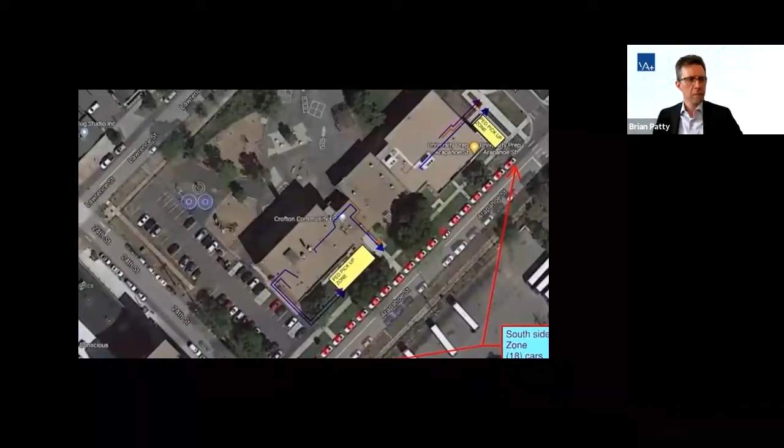Our firm, VA Plus, is the BIM consulting division of Vertical Arts, a Colorado design firm with offices in Denver, Steamboat Springs, and Edwards. We are currently assisting my son's elementary school, University Prep, as they make preparations for in-person instruction. We have spent several weeks developing tools and workflows centered around PDF floor plans, CAD files, BIM files, and mobility simulation software.

Our workflows are based on 4 key objectives: safer classrooms, safer circulation, safer arrivals and dismissals, and safer air.

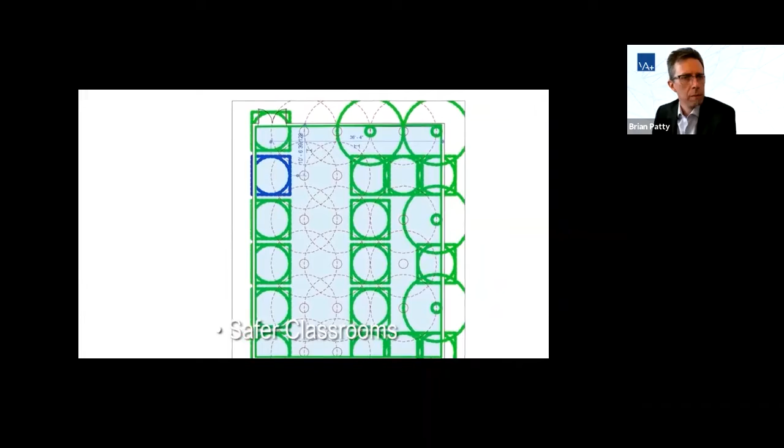Safer classrooms. VA Plus is using Autodesk Revit generative design and our own workspace density planning tool to develop safer classroom layouts that accommodate social distancing guidelines.

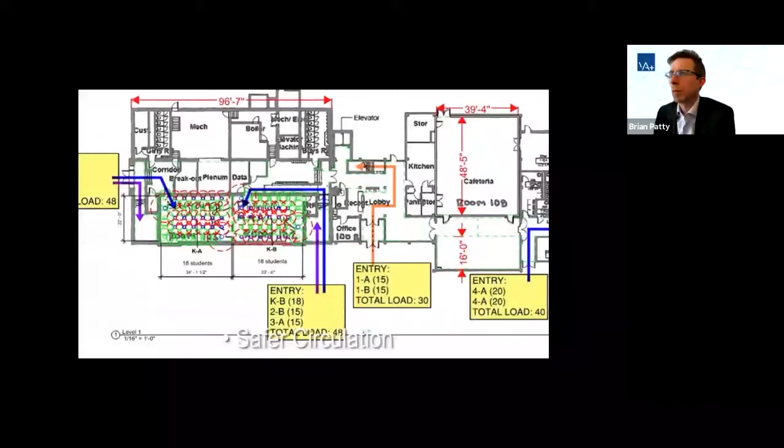Safer circulation. By implementing one-way corridors and not crossing cohorts, the protective effects of social distancing measures can be enhanced.

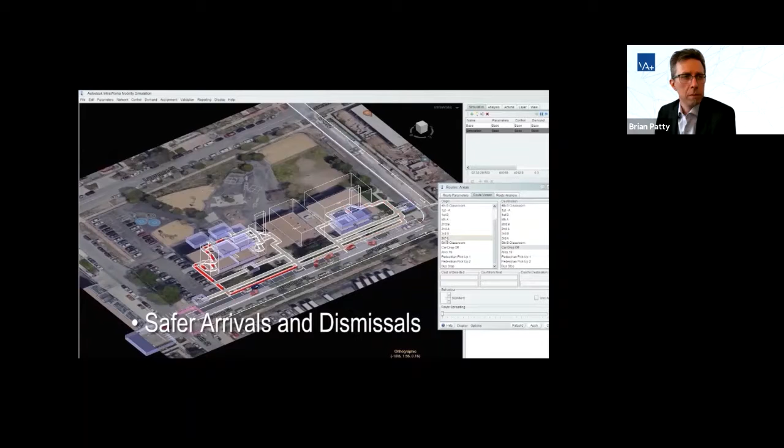Safer arrivals and dismissals. Using classroom loads and safer circulation, we can simulate student flow and help schools evaluate the need and benefits of staggered arrival and departure plans, and provide a framework for staffing demand and logistical communication requirements for implementing these plans effectively.

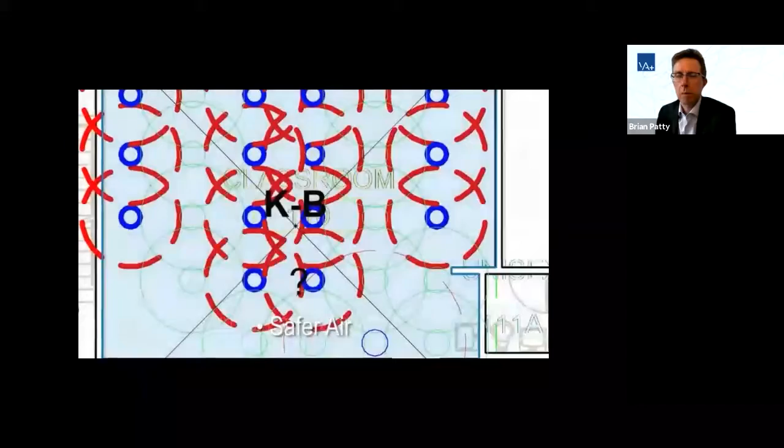And safer air. We are looking for mechanical engineers that can use components of our workspace density planning tool to integrate airflow analysis data into Autodesk Revit.

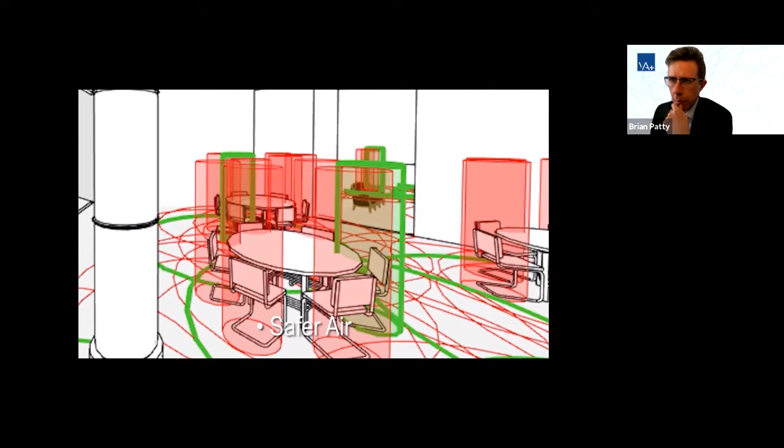Revit is a CAD BIM software package that architects and engineers routinely use. Our tool can be used to represent students, so an engineer can analyze the airflow and aerosol transmission potential with current HVAC and classroom layouts, and what mitigation options are available.

My son's school, like many schools that you're going to run into, didn't have a BIM model for their campus or anything like that. They simply had some pretty rough PDFs on some pretty small scale paper.

What we're going to cover in this process is just what it's like to take in a PDF and essentially set up the minimum amount to be able to evaluate it.

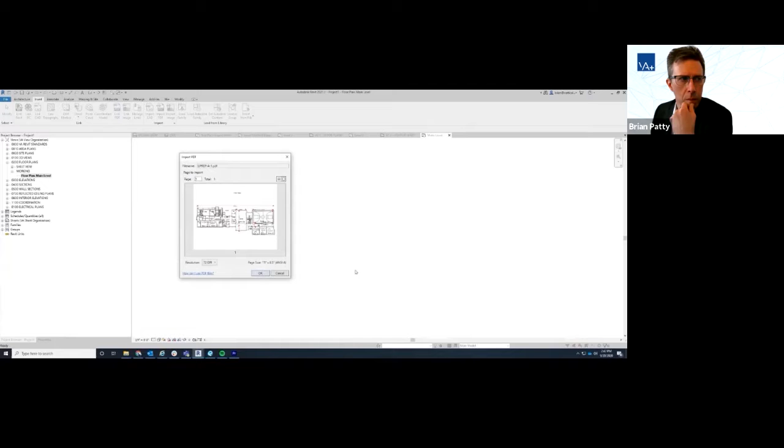First, we'll go ahead and just open up a blank file and go get the PDF by going to Insert. Pick out the PDF. I like to change the resolution a little higher based upon it being a small scale PDF, so the size shouldn't be a problem.

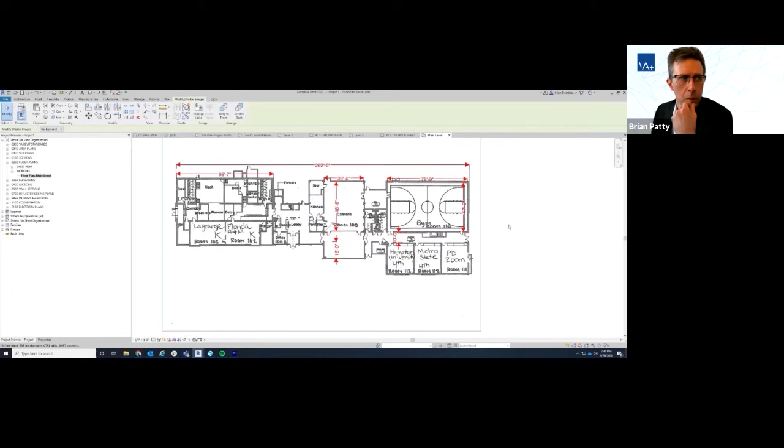Drop in a reference line in here to be able to establish the scale, and then just position it here to confirm that you've got everything correct. Once you're happy with the scale, you can go ahead and lock this file down by pinning it. Just double check it here real quick, make sure that matches up reasonably close to what we think is the right size.

So from here, what we're going to do is we're going to go in and actually use room separation lines in rooms to draw out the minimum amount of information to allow us to do rooms.

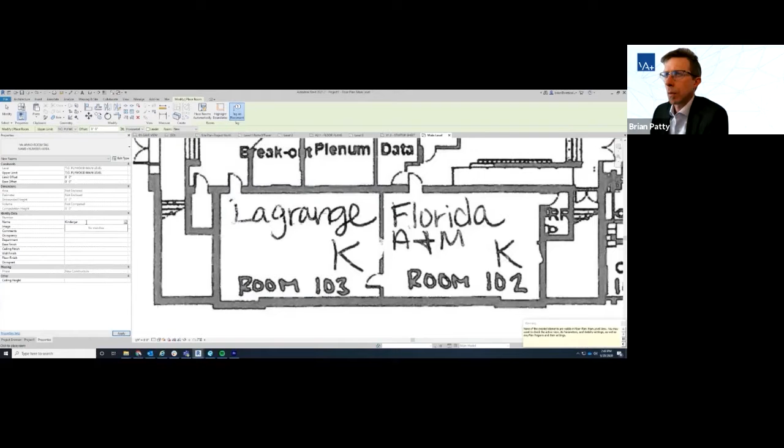The reason to do rooms is it allows us to schedule per room and per level, and also per building. That way we can determine loads and understand the entire system. And also, I like to be able to see the rooms themselves. Just makes it more clear which ones I've actually gotten done.

We'll move to another classroom here, and first thing we're going to do is you can see that we've just got a simple room tag. It's being driven by a comment to show how many students are in there, just to make it a little easier. Next, we'll go ahead and do a quick offset with some detail lines in the room, about 2 feet, just to imagine where students actually could get to.

Then we'll go ahead and place the student in here, and then we'll array this student, and reasonably maybe get 4 in this row.

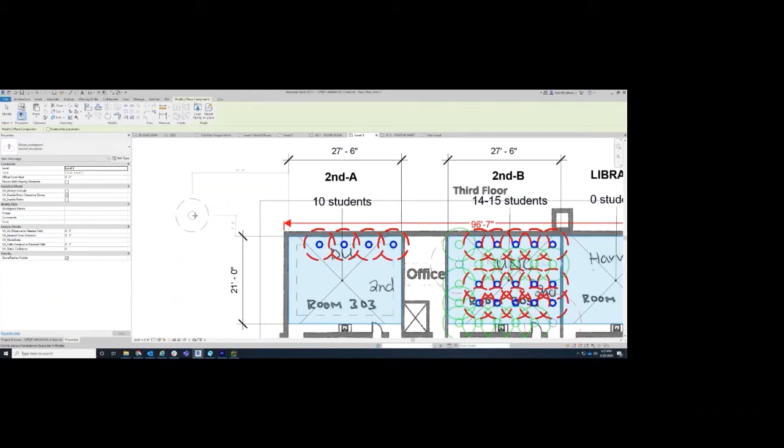Then let's go ahead, and what we'll do next is we'll put in some circulation and make sure that we're spacing the students out correctly. Again, it's just using the inner circle as the person, in this case a teacher, so it's a little larger than the students since these are elementary school students, and then a 3-foot social distancing based on DPS's standards.

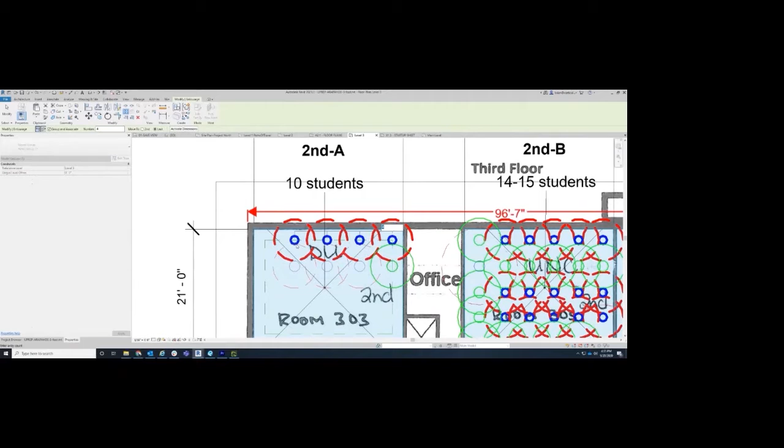And what we're doing here is we're just using some simple filtering on these views to make it easier to see the circulation versus the students. And we'll go ahead and add a couple more rows of students in here.

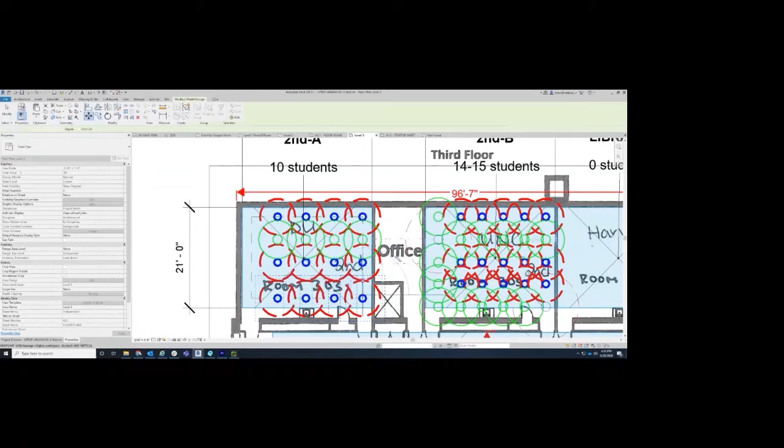Move them into place. So we've got achievable density in this layout, and we establish that we've got enough circulation for the students to actually move around. In this particular classroom they'll have two teachers in it, and we can start to look at alternate ways of where we can put circulation for the students to move around, or enough room for teachers to have a desk and for normal function as far as chalkboard or whiteboard operations in the classroom.

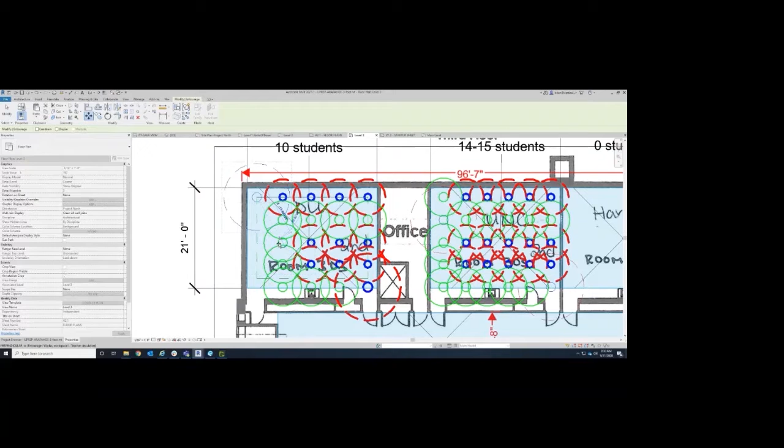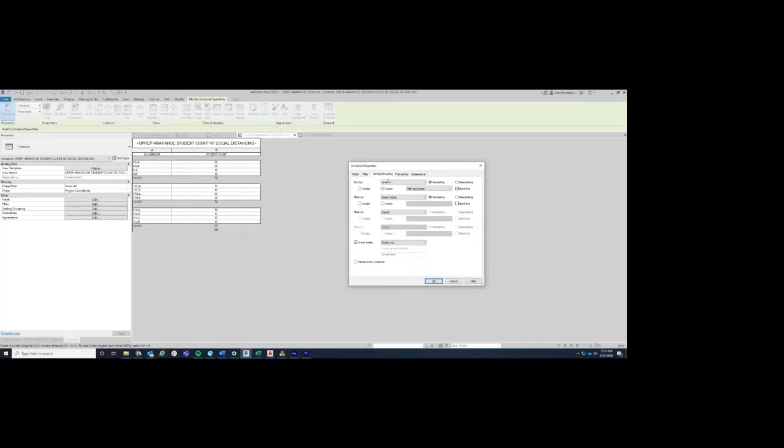Next, you can see what we've done is we set up a schedule to report what was going on in each one of the classrooms. Pretty simple parameters, just using a level, the room name, and the description, which we use to filter so we're only getting the students and not the teachers. Then we sorted it by level, so we could get subtotals and a good sense of what you had at each floor.

Next, we printed off the sheets with the floor plans into PDFs and brought them into Bluebeam, where we marked them up and indicated some loads as well as some one-way paths of travel. To do the paths of travel, we simply used a markup tool, the polyline, with an arrow on one end to indicate direction. Nothing too complicated here, but it allowed them to easily see with some colorful visuals how students would be able to circulate without mixing cohorts within the school.

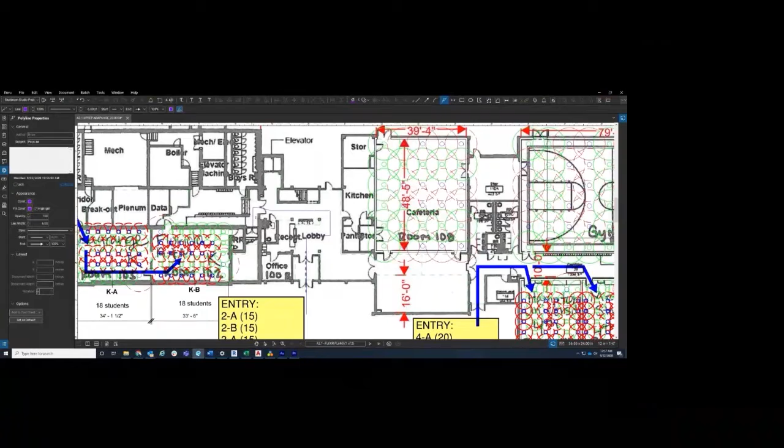The dismissals were essentially a reversal of those same paths, since the cohorts aren't supposed to mix with one another, and we kept the arrivals and dismissals from the same doors.

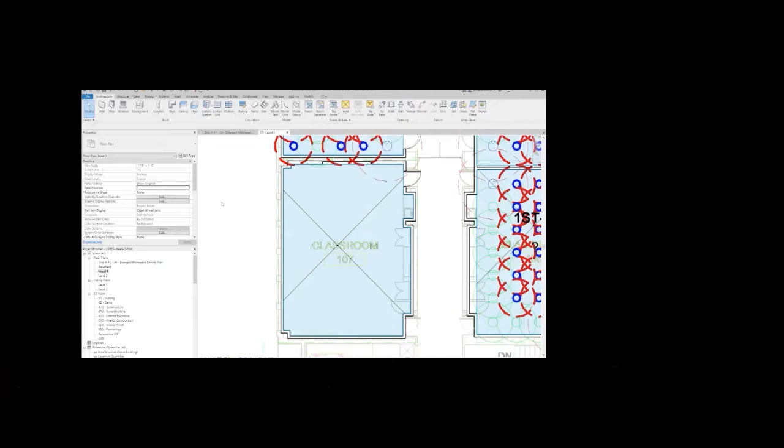Our workflow utilizes the generative design tool in Revit to create new classroom layouts. For this classroom, we'll generate a layout of student desks using a modification of the workspace layout script that comes with Revit's generative design tool. This allows us to explore configurations and find the upper limit of how many student desks can exist in the room while complying with social distancing guidelines.

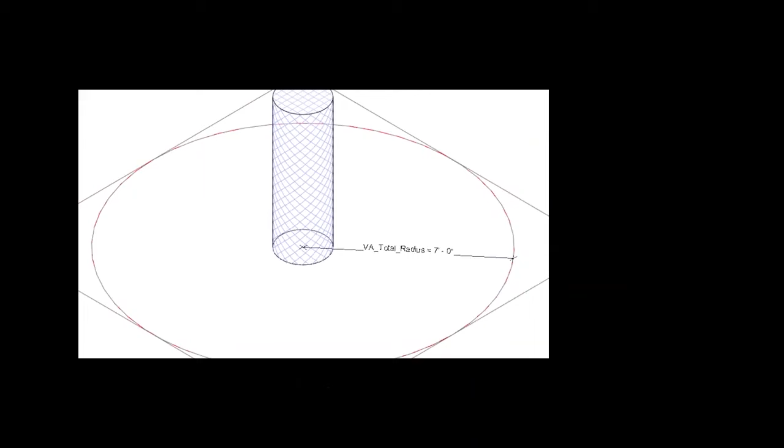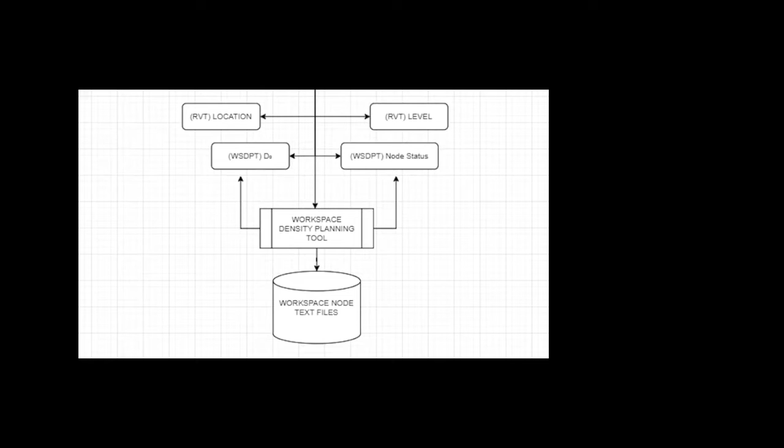We have modified the generative design script to also place our workspace family in addition to station furniture. These workspace families represent an occupancy point, which is common across our workflow and allows both generative and manual placement to have identically accessible, machine-readable results that are managed and reportable through our Workspace Density Planning tool add-in, which also makes this data available for tools outside of Revit in the form of plain text files.

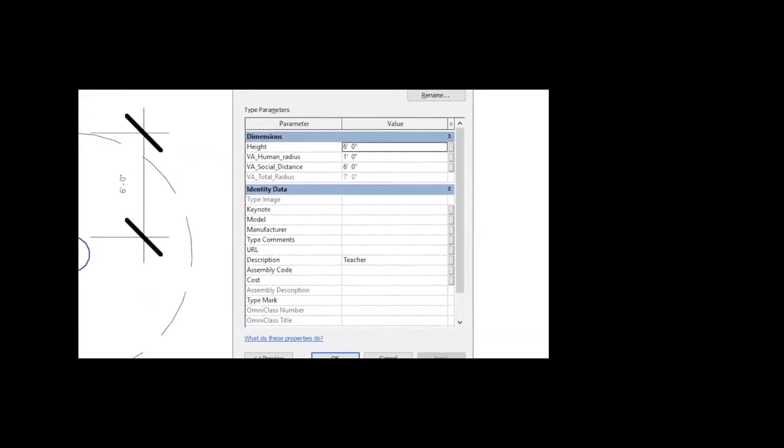In this project's case, the guidelines specify a radius of 3 feet for students and 6 feet for instructors. The social radius and inner human radius of workspace families can be adjusted in the family type, and multiple types can be used to represent different kinds of occupant stations, or to represent circulation nodes.

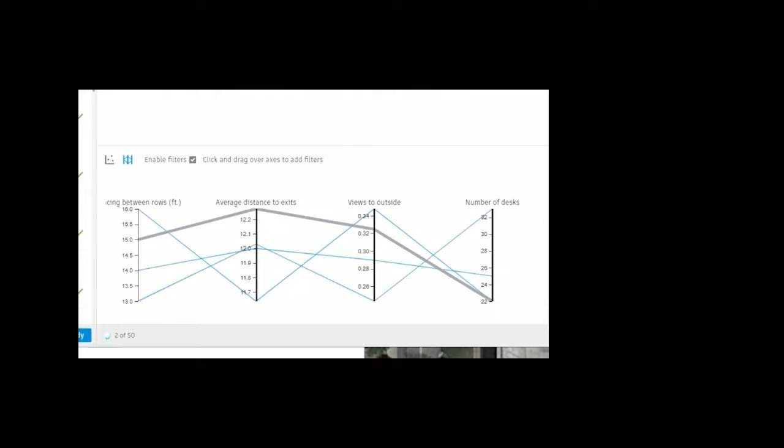Next, we generate layouts in the Revit Generative Design tool, then select a desirable layout, and Generative Design places our workspace families in the model. A 6-foot radius workspace type is also manually placed to represent the occupancy point for the instructor. But in order to represent the higher mobility of this role, which must have access to the student workspaces, we will also place circulation nodes.

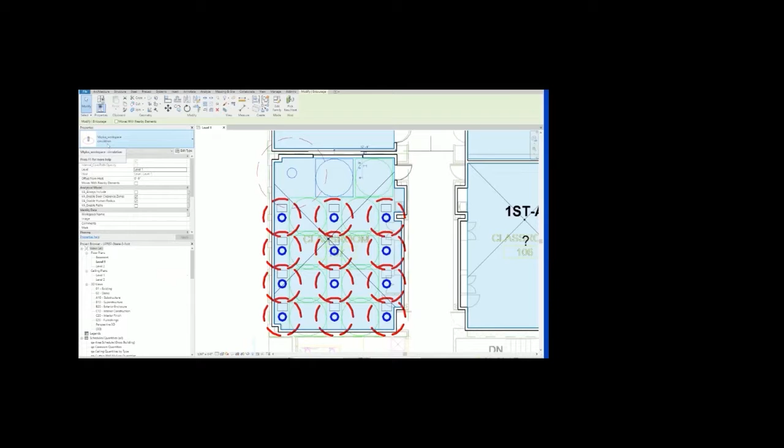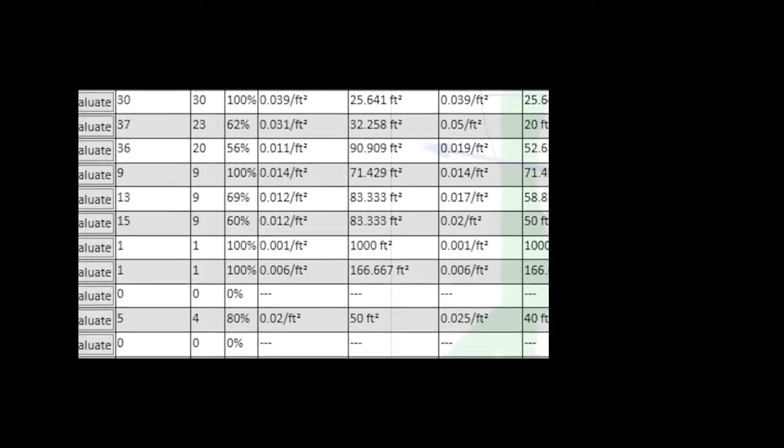Circulation nodes can be created as a type in the same workspace family by enabling the circulation parameter. This can signal to other tools, such as the Workspace Density Planning tool, other add-ins, or Dynamo scripts, that instances of this type are to be evaluated as a passage with revolving occupancy, which does not count towards occupancy totals of a room. Circulation nodes are placed in the aisles created by the Generative Design script's layout.

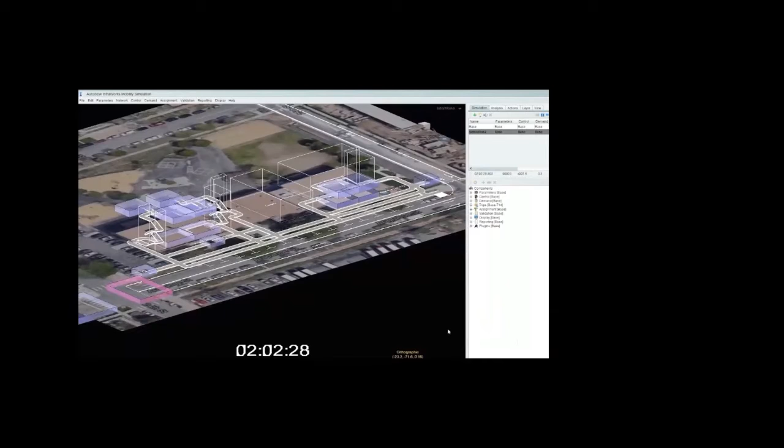We run the Workspace Density Planning tool to create a report. This process is performed for all the classrooms at the school. The passing workspace family instances will inform the final occupant counts for each classroom that are used downstream in InfraWorks mobility simulation in order to create a mobility study.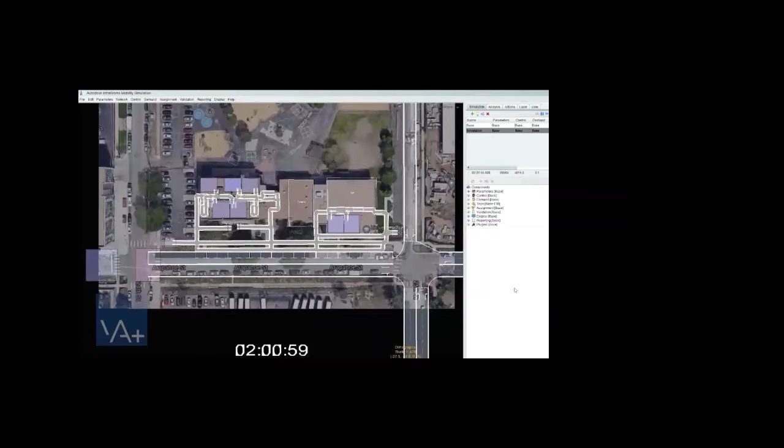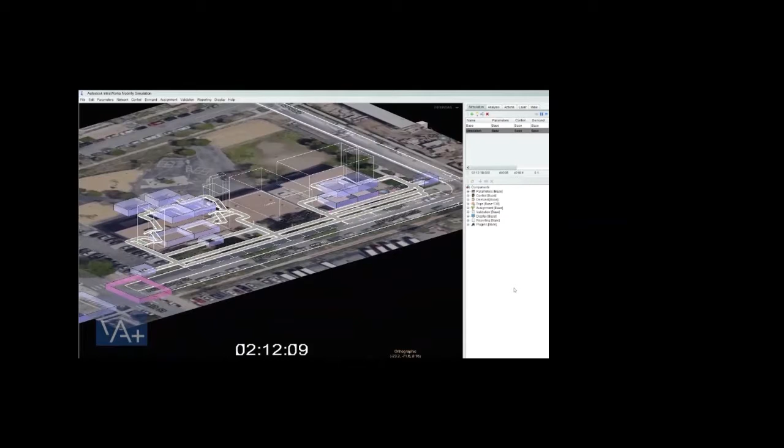Mobility Simulator in Autodesk's InfraWorks was the perfect tool for us to use to validate our proposal. We were able to simulate our specific dismissal plan and see if it met our client's goals and COVID-19 guidelines. The tool has enabled our clients to really visualize the dismissal plan and promote a more informed conversation leading to the best solution path. Benefits of using Mobility Simulator include showing how long dismissal and arrival will take, showing the length of each student trip, showing if social distancing is being met, and representing the traffic density at the pickup zone.

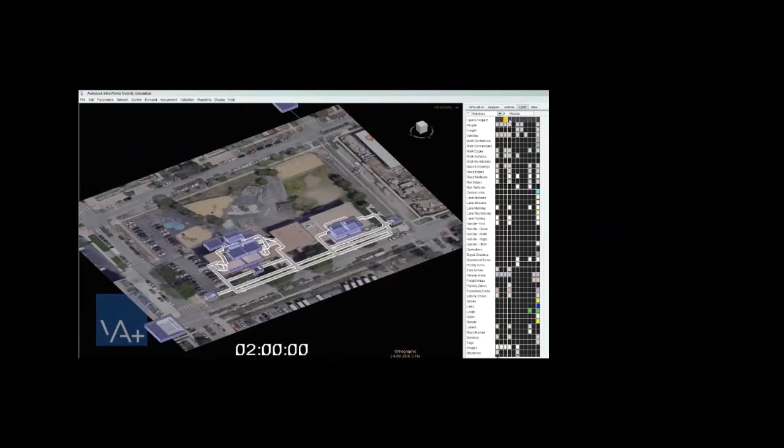Using the dismissal plan PDF outline, a network is created in Mobility Simulator to simulate the dismissal sequence. Classrooms are represented by areas, as well as the bus stop and pedestrian pickup zones. This allows us to route students from all the classrooms to the bus stop, the pedestrian pickup zones, as well as to the vehicle pickup zone based on real data provided by the school district.

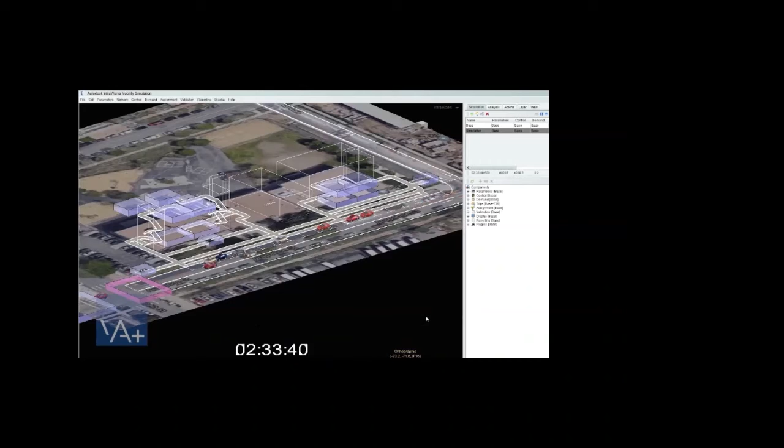Social distancing is simulated by increasing the space parameter for people to the social distancing radius, as well as by adjusting the capacity of walkways to their length divided by the social distancing radius.

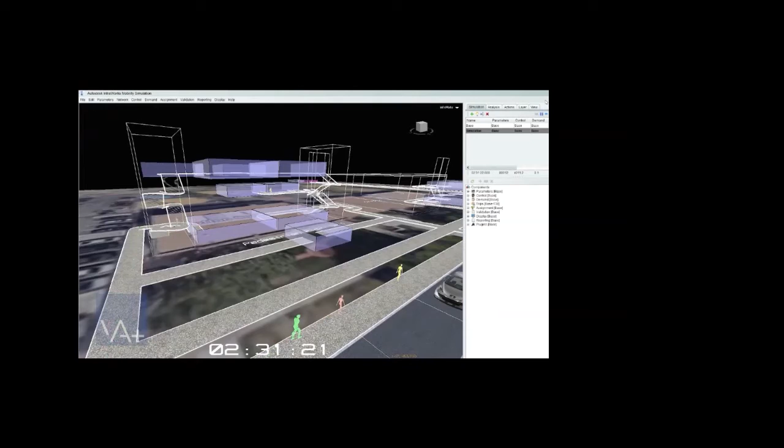We wanted to show the bus dismissal taking place before the rest of the student dismissal to reduce corridor load. So we set up some additional terms and demand profiles, allowing us to stagger the dismissal of groups of students.

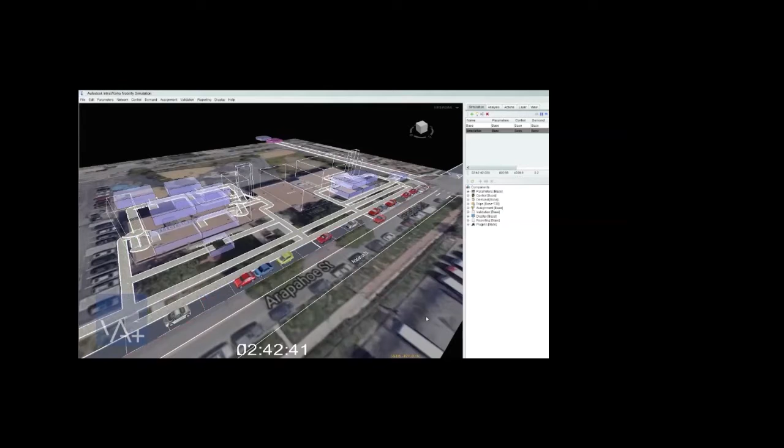Many school layouts will lead to conditions where there are multiple routes which connect destinations. This can be helpful in simulating typical situations where people will make choices more randomly, but for our purposes, we want all of the students to follow their dedicated paths, helping avoid collisions.

We utilized the route spreading tool to eliminate deviation from the main paths. This tool is also used to test the network and make sure routes are connected and functioning as planned.

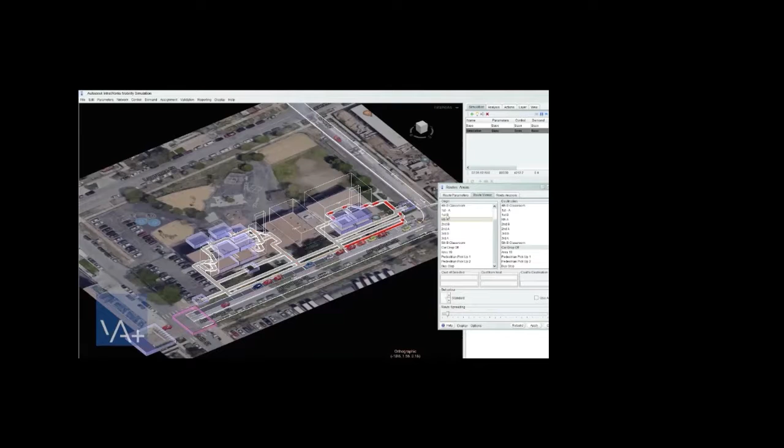We wanted to use the simulation to show the potential impact our plan would have on the vehicle queue for pickup, so we incorporated the vehicle pickup into our simulation.

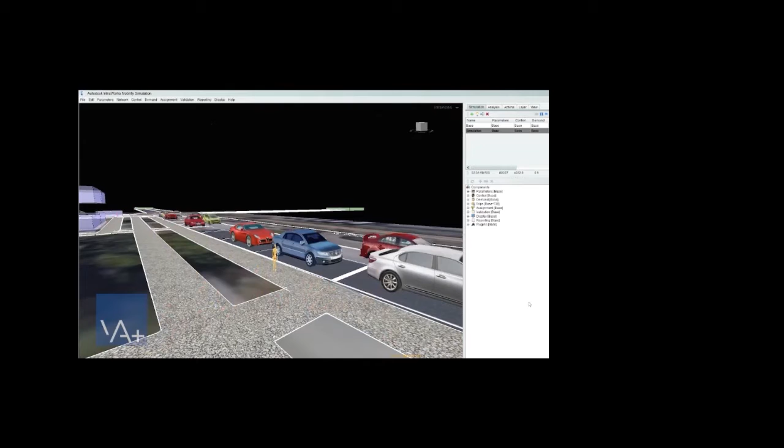We have a group of cars assigned to fill up the pickup lot over the simulation time. As students arrive at the pickup lot, they will get into a waiting car and leave. We increased the time for students to get in the car to help simulate additional time the cars will be waiting in the parking stalls.

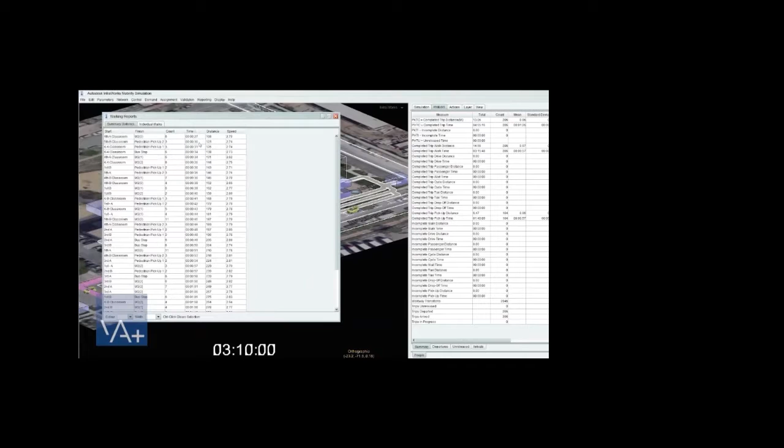To evaluate the simulation, we utilized the information shown in the Analysis tab, which gives a summary of trips with times and distances. We then reviewed the walking reports, which show individual trip times and distances, and the level of service, which shows if spacing is being met on all walkways.

These tools can show that the client's goals are being met and their concerns addressed regarding the time for dismissal and the ability to enforce social distancing.

Mobility Simulator can be used to solve a range of problems related to getting students safely back to school, from arrival sequences and class transition sequences to simulations for middle and high schools, as well as parking and class transition simulations at universities.

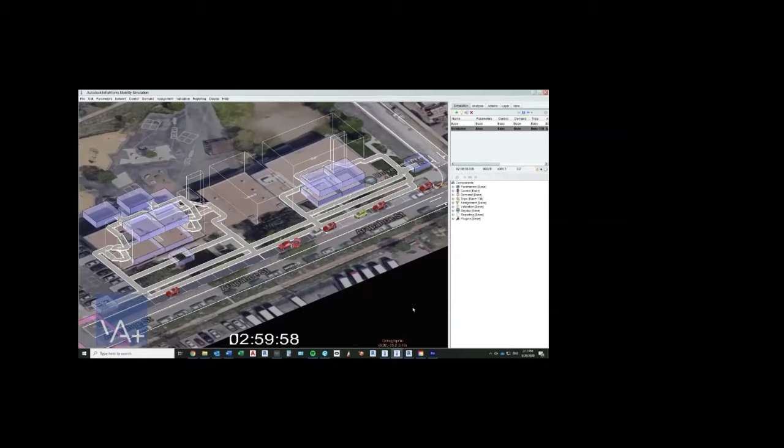Today I'm going to show you some basic tools, workflows, and techniques to help you get started using Autodesk's Mobility Simulator. Autodesk Mobility Simulator is part of Autodesk's InfraWorks and is included with the AEC package.

Wanting to learn more about this powerful software that our company already has access to, I spent just under 2 weeks working with Mobility Simulator to learn how it works and to explore how it could be used to improve architects' workflows and help them better solve their clients' problems.

After learning the basics of the software, I began to explore how Mobility Simulator could be used to evaluate back-to-school procedures and help improve students and students' families' safety as schools are beginning to reopen during the COVID-19 pandemic.

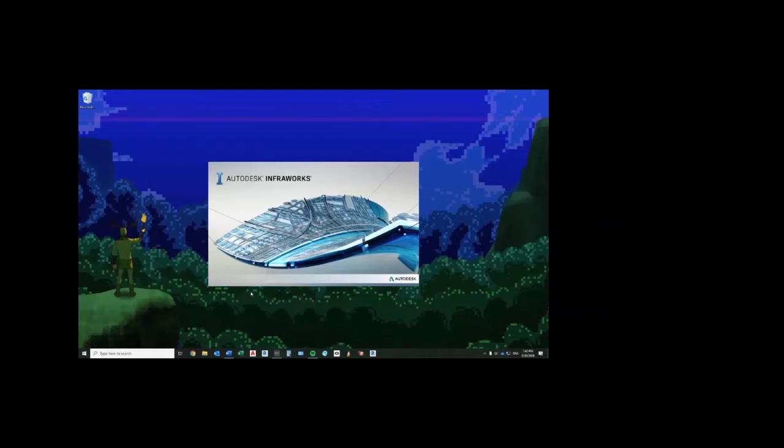To get started, we are going to launch Autodesk InfraWorks to begin using Mobility Simulator. Open an InfraWorks project - it can be any project. Once we are in Mobility Simulator, we will start a new file anyway.

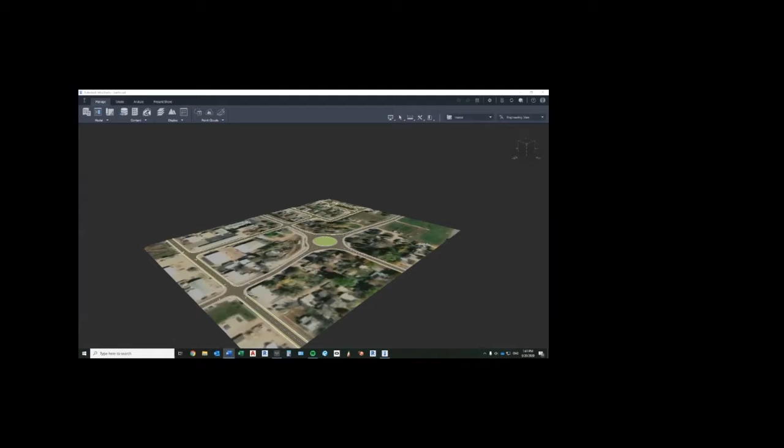Once we are in the model, we need to draw a traffic study area. Go to the Analyze tab, click on the Transportation drop-down, and then Mobility Simulator. This will then prompt you to draw a traffic study area by defining the corners of a polygon. Once you have drawn your shape, hit Enter, and then right-click within the area and select Mobility Simulator.

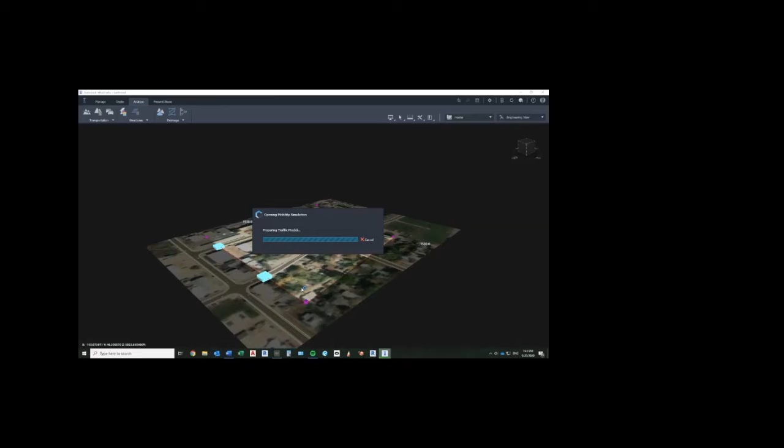This will launch the mobility simulation software. Please note that you will need to have a Java runtime environment, or JRE, installed on your machine in order for this program to function.

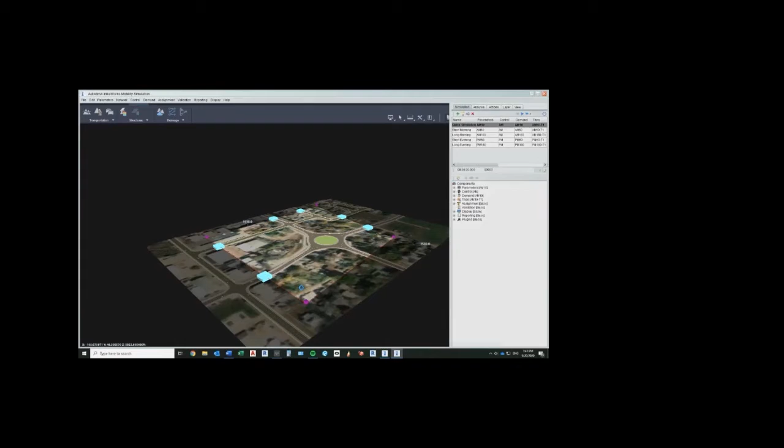Once the software is open, go to File, New, and select Cancel when the wizard opens. This is our interface for Mobility Simulator. You can orbit with the left mouse button, pan with the right, and zoom in and out using the scroll wheel.

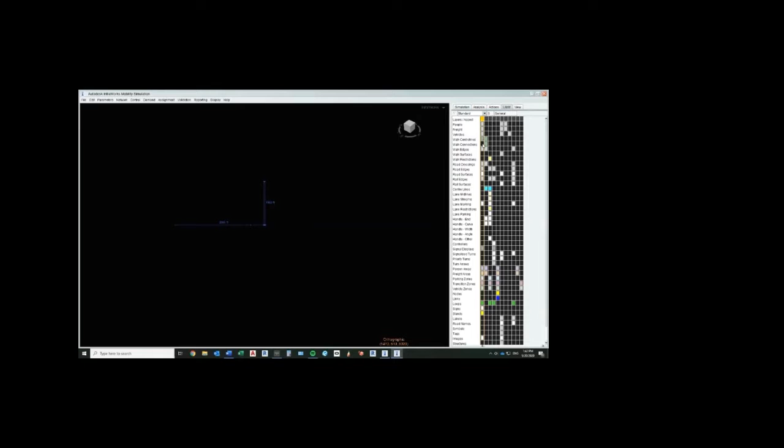Before we do any modeling, we need to make sure that we are in orthographic mode by hitting the O key. We also need to turn on some layers so that we see everything we need to as we are modeling. In the Layers tab, ensure that Walk Center Lines, Walk Connections, Handle End, and Handle Other are highlighted.

Finally, select the top of the view cube to orient to a plan view. Now that our interface is set up, we are going to create a simple simulation in which we have pedestrians walking from an origin to a destination.

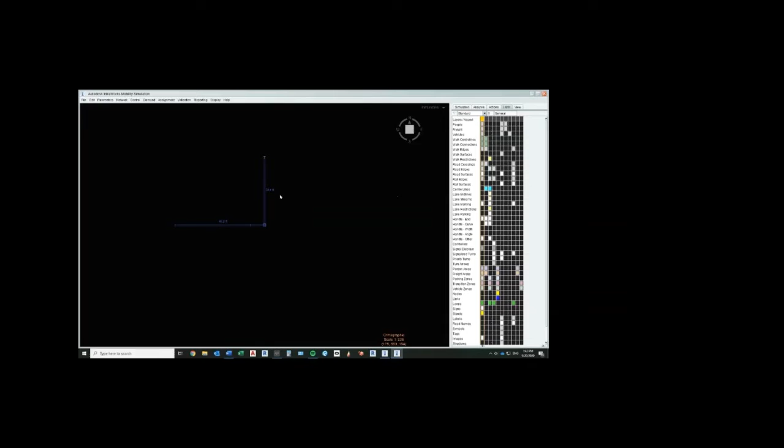Zoom in until the cursor length is about 50 feet. Right-click, click Walkway, and select New Walkway at Cursor. A window will open where you can input the length, width, and name of your walkway. You will notice that the default length is set to the length of the cursor. We will make our walkway 6 feet wide and select OK.

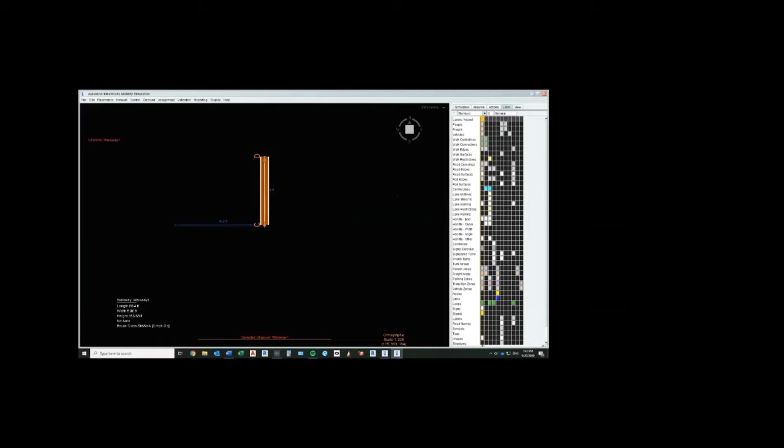I'm going to add another leg to the walkway at an angle. If you deselect the walkway, you can rotate the view using the right mouse button. Then we will position the cursor just above our existing walkway and create a new walkway at the cursor again. Our simulation will need at least 2 walkways to function correctly.

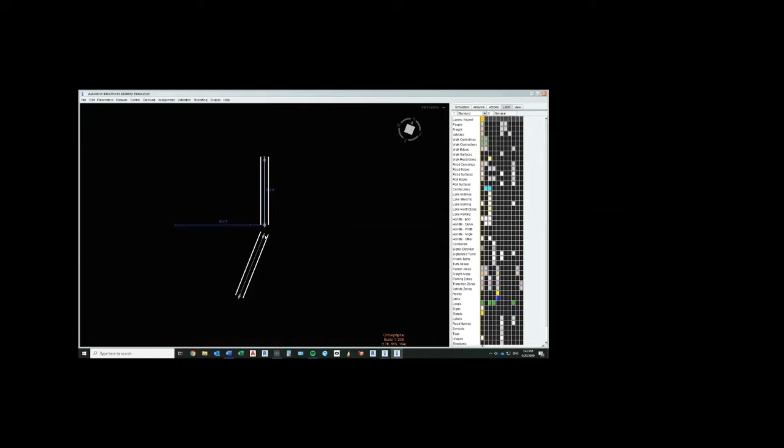Another way to achieve this is by selecting your walkway with the middle mouse button, right-clicking, clicking Walkway, and selecting Bisect. This will divide your walkway into 2 pieces connected by a walkway connection. Next, we are going to select the endpoints of our walkway, right-click, Walkways, New Connection to join them together.

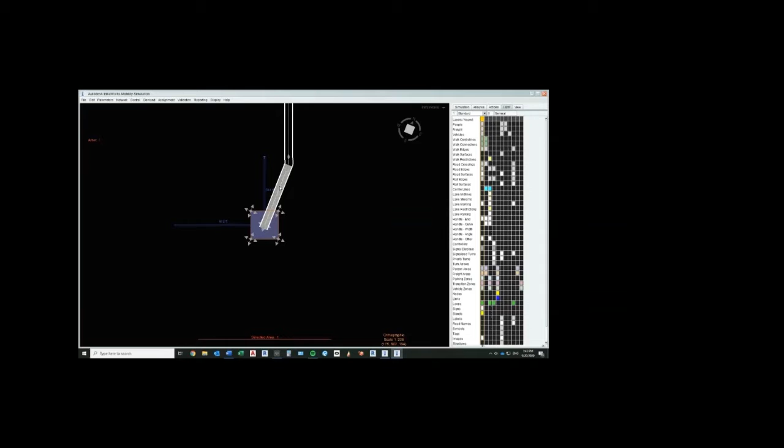Next, we need to add areas. These are where people will originate from, as well as where they will travel to. To place an area, pan your model until the cursor is just above a walkway endpoint. Right-click, New Area at Cursor. It is critical that your area is connected to the walkway. You know they are connected if the walkway highlights when the area is selected.

Also, if you select the walkway, it will indicate which area it is a part of. Do the same to place an area at the other end of your walkway. Save your model after creating your areas. This will force the program to correctly recognize the areas.

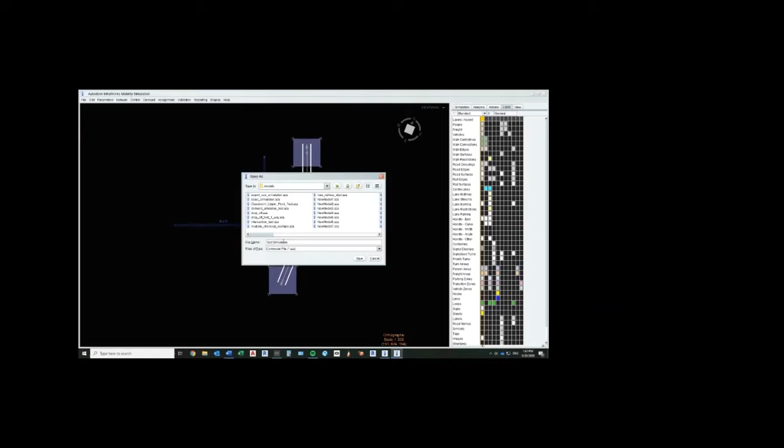With our network in place, we are going to move on to setting up the parameters and the demands for our simulation. First, we are going to set up the term for our simulation. Go to Parameters, Terms, and this will open up the Simulation Term window. Currently, this is set to run from 8 o'clock to 9 o'clock. Let us adjust this time to be from 8 to 8:30.

Now we are going to add some person types. Go to Parameters, Person Types. Click on the plus button to add a person type. Then we can adjust their name, the color of their avatar, and some additional parameters. In the other tabs of this window, we can adjust other aspects of the person type, including their speed and other physical attributes. We can also create groupings of person types as well.

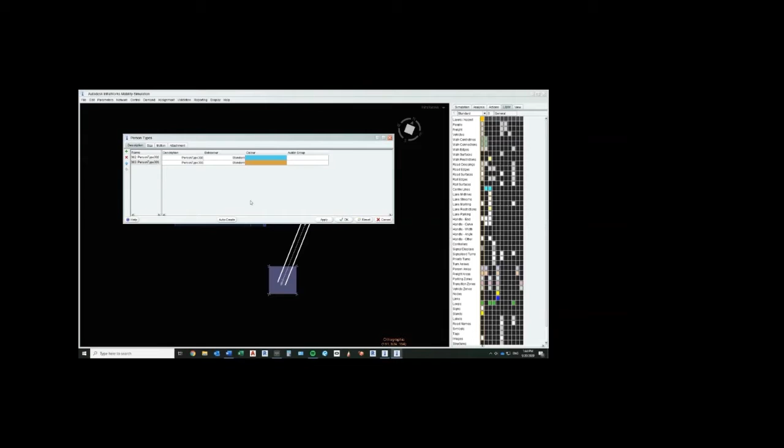Let us create another person type with a different color. Now say there are 80% of the first person type and 20% of the second. To show this in our simulation, go to Demand, Demand Divisions, and then input the percentages for Division 1. This means that demand created from Division 1 will include the input ratio of person types.

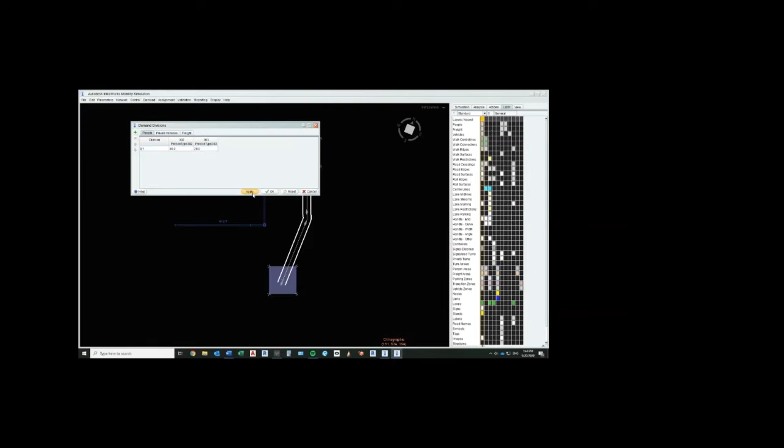Now that our parameters are set up, we are going to set up our demand. This is what will inform the simulation how many people are moving between the origins and destinations. Go to Demand and then Demands. This will open the demand editor. Click on the green plus button to add a new demand matrix.

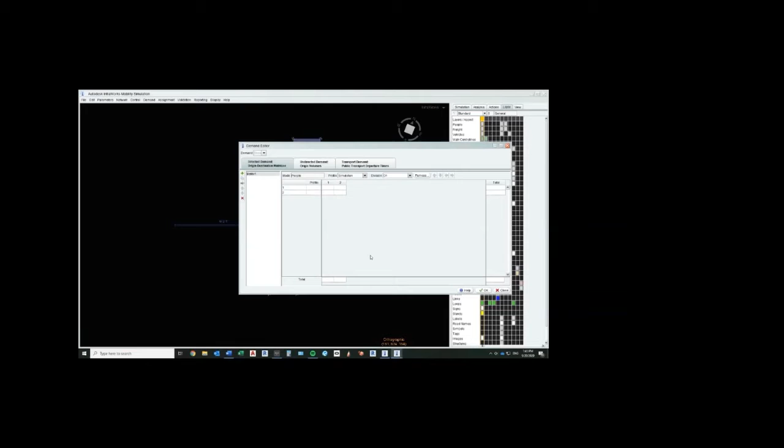Ensure that Division 1 is selected and hit OK. This creates a matrix with all of our areas represented at each axis, one being origins, the other destinations. When you click on a box in the matrix, an arrow will appear in your model which shows the origin and destination, as well as the direction of the trip you have selected. Let us add 200 people moving from one area to the next.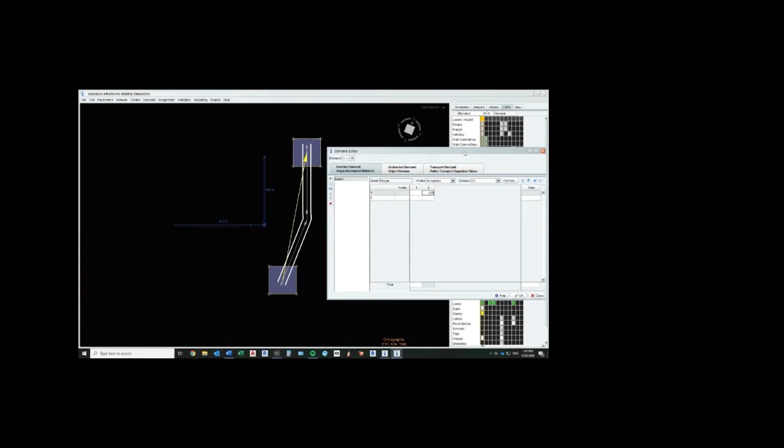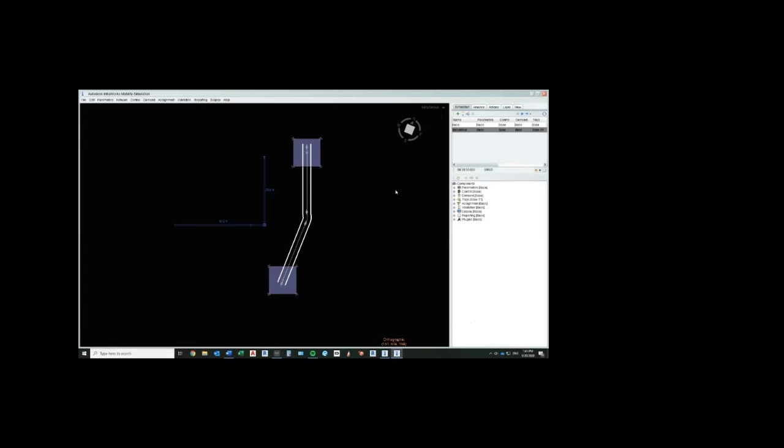Now that our demand is set up and trips have been generated, we are ready to begin the simulation. In the Simulation tab at the right of your screen, click on the green plus icon. This will create a new simulation with our current parameters and demands active. With the new simulation selected, click on the light bulb icon. This will make this the active simulation. Click on the play button to begin the simulation. You will now see your agents begin to complete their trips.

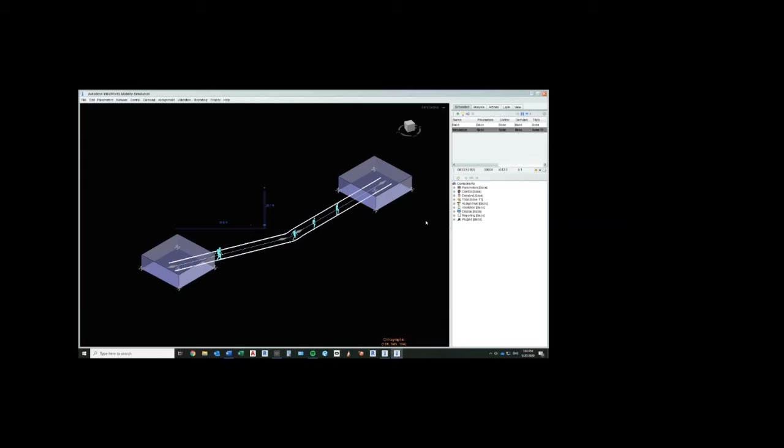Mobility Simulation has many additional features that will allow you to simulate multimodal transit, pedestrian crossings, parking times, elevators, and much more complex networks to simulate real-world problems. Hopefully, this demonstration has provided a footing for you to get started using Mobility Simulator and help bring the power of this AEC-included tool to your clients.

All right, we're nearing the end of this. It took us a little while to figure these pieces out, so if you need help, reach out to us, and we would certainly be grateful to help anybody help their local schools, things like that, to be able to do this.

We also have an add-in that we have developed. Hi, I'm John Resch, and I'm the BIM engineer at VA+. This is a preview of an add-in we're currently developing for linking Revit content into InfraWorks Mobility Simulator.

There are a number of benefits we have found to bridging these two environments, chiefly reducing the need to recreate or redraw content that already exists. By making the use of Mobility Simulator more accessible to Revit users, this enables mobility simulation to be used in more design decisions in existing BIM-centric workflows. And by bridging the concepts of mobility as a system into Revit, this also creates an interoperability path.

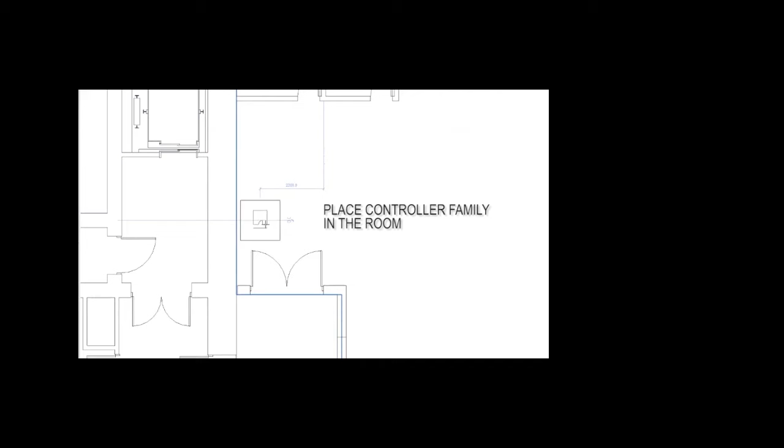Now let's take a look at how this looks from a usage standpoint in Revit. For ordinary rooms, you place a room controller family within the boundaries of the room. This tells the add-in to sample and categorize the room in order to model it as a mobility simulator area, and the add-in will create a segment between it and the nearest door for typical cases.

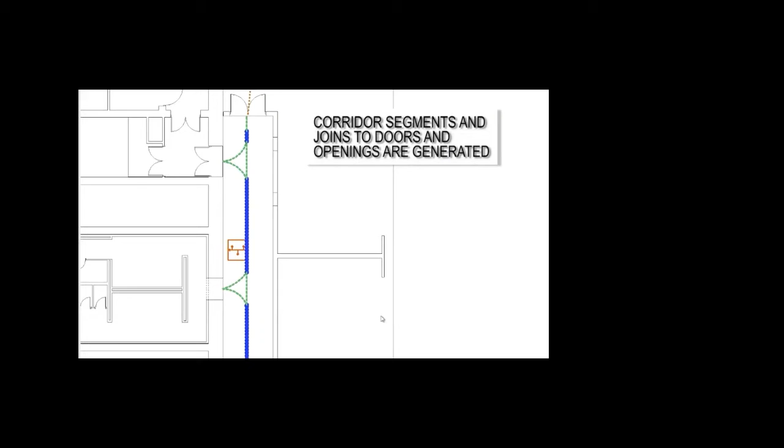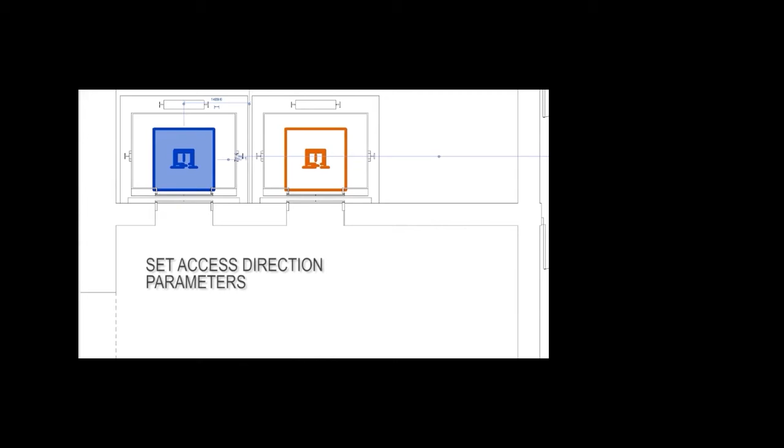Next, we set up an elevator or lift stop for this floor plan's level by placing a lift type of the controller family, and set the direction parameter for the direction of access. Then we create another corridor to represent the elevator lobby.

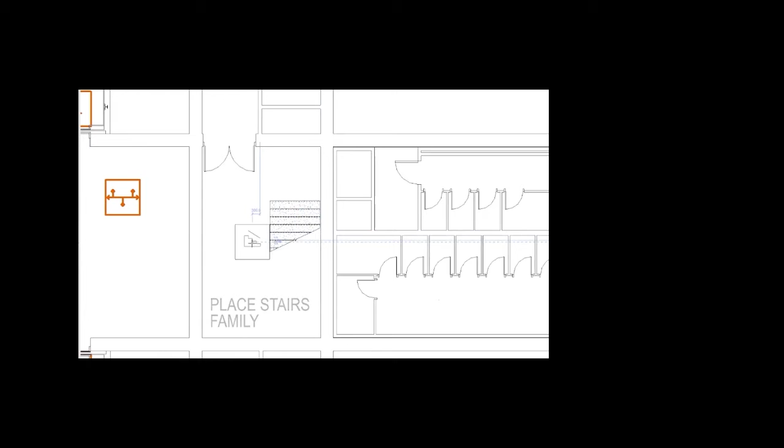Next, we create another corridor in the core of this tower model, which happens to have access to stairs. This time we place the stairs type of the controller family, which tells the add-in to sample the stairs inside the Revit room and generate a more complex equivalent structure in Mobility Simulator. We also add a vestibule for those stairs.

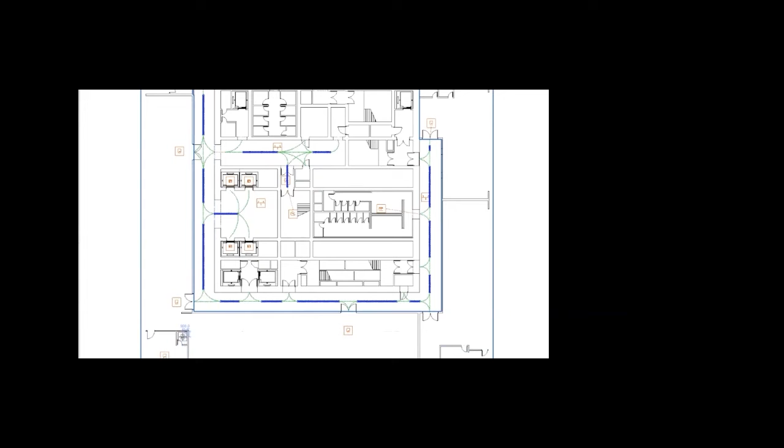For larger, more complex rooms, there will be a need to represent a sub-network that permits connections through the room between doors and subrooms. For this, we place one room type controller family near each door, and subroom type controllers within each subroom. This tells the add-in to analyze the room as both a corridor and as a destination, which can participate in the mobility simulator's demand matrix.

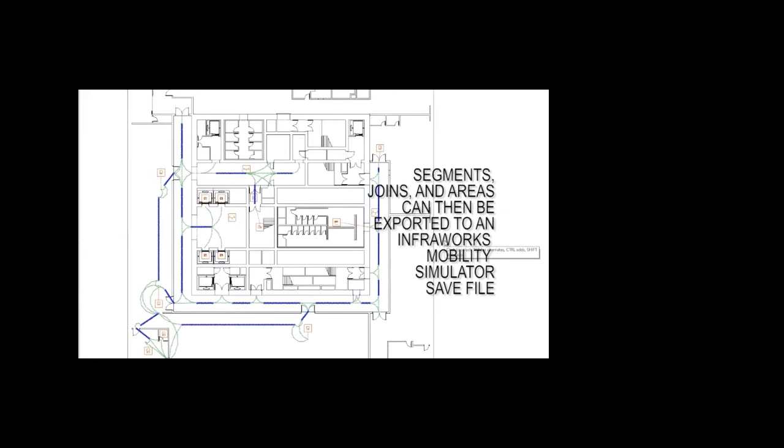The resulting lines and families can then be exported to a mobility simulator save file, populating it with mobility objects proportional to and representative of the mobility network of a floor plan's layout, so its usage can be simulated in greater detail.

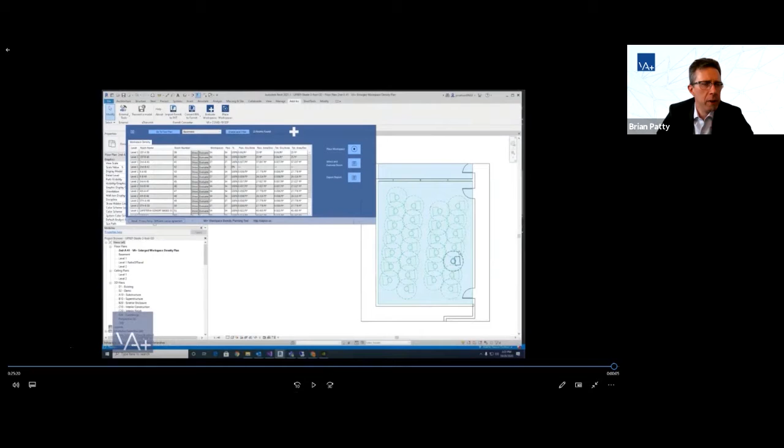So in here, what we're showing, we also, if you go to the Autodesk App Store, our social distancing tool, this add-in that works with Revit, is also available there for free. It's just showing a couple things you've already seen, but where it's available.